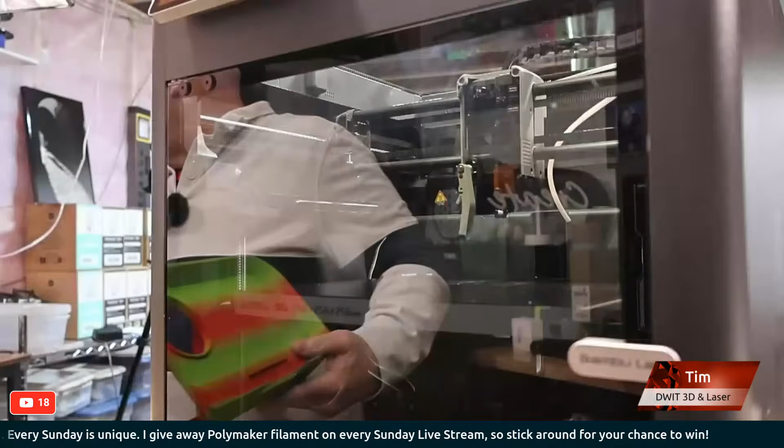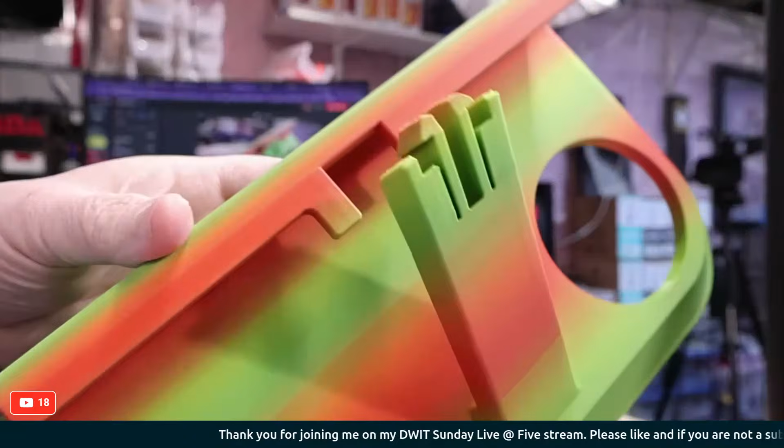Oh, turn the camera this way. There we go, I'll show you the print. The print printed beautiful - this is the bottom layer right here. I love the color mix, it's just a fun print. And there's the back side of it. Really nice, clean print.

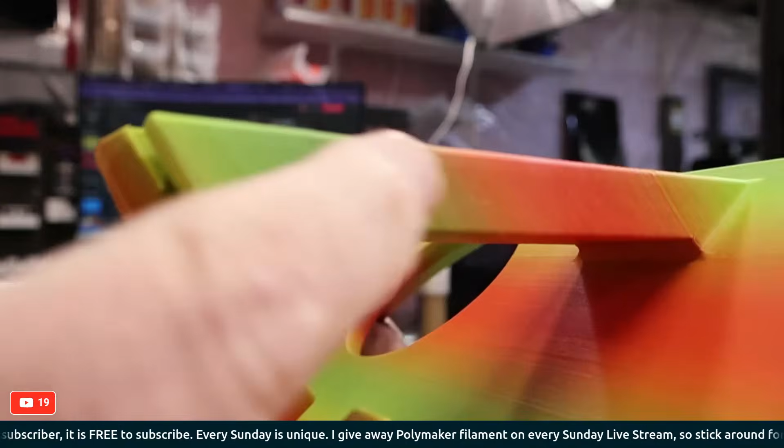If I hold it in a certain light, you can kind of see it had a little bit of a Z-wobble going on right about here, something like that. I think my belts need a little bit of tightening on this printer, but otherwise everything is beautiful on this print.

This just clips over the front handle of your cart, and these little things here just clip into the little railings there - it's kind of cool. Oops, got a little bit of a wobbly part there. But that's what I was working on, so that's pretty cool. People at Costco are going to see that and say, where can I get one?

And the site I got that off of, you can become a Patreon and actually sell his pieces. So we're going to look into that, or I'm going to reverse engineer and design my own. We'll see, I kind of like doing the reverse engineer stuff, designing my own piece so I don't have to pay anybody to sell the piece, or just come up with my own since there's a few tweaks I'd like to do on it.

No weekends or holidays in the world of bagel making. No kidding, 850 to make and deliver. Holy crap, that's a lot of bagels. Wow.

Love bagels, but I can only eat so many because of the diabetic thing. But I love a good bagel.

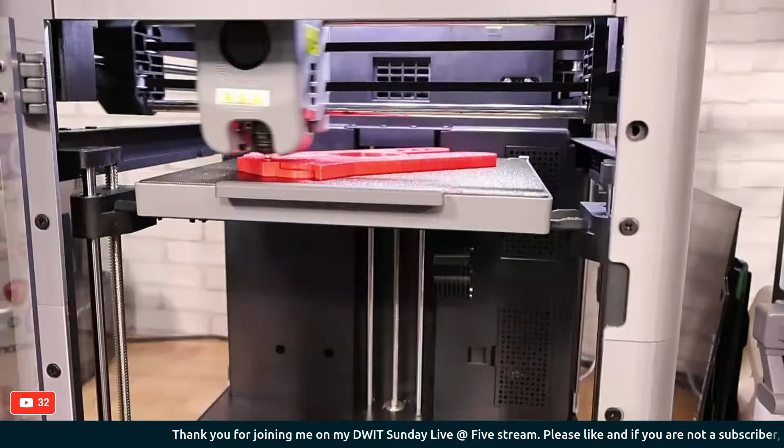I haven't showed this printer off too much at all, but this is the FlashForge Adventurer 5M. This printer over here is just printing one of those hangers I was telling you about - that's what's going on this one, and it's doing a really good job printing this.

So I got sidetracked there. Let's get this tripod back over on the right side - there we go. So we can go ahead and fix this part, and we're going to come down and right about there.

That sounds good. Doing a candy machine off Maker World - need to regulate Skittles intake. Oh, Stephen Machado, you said candy machine. I guess I got to show you what my next project is, because it's right up the alley of a candy machine. So I'm going to show you.

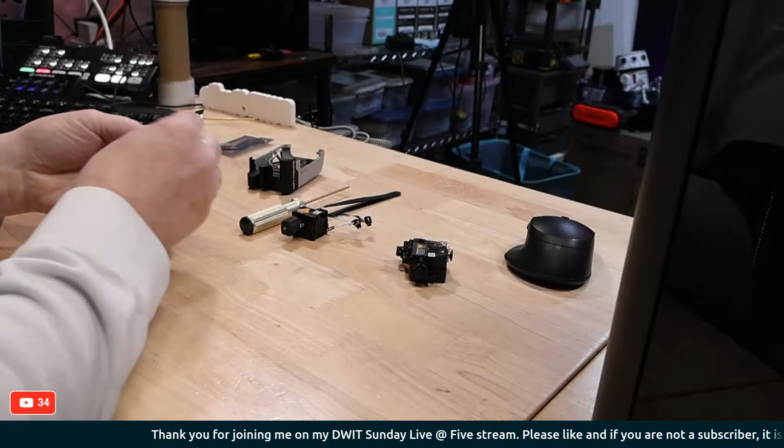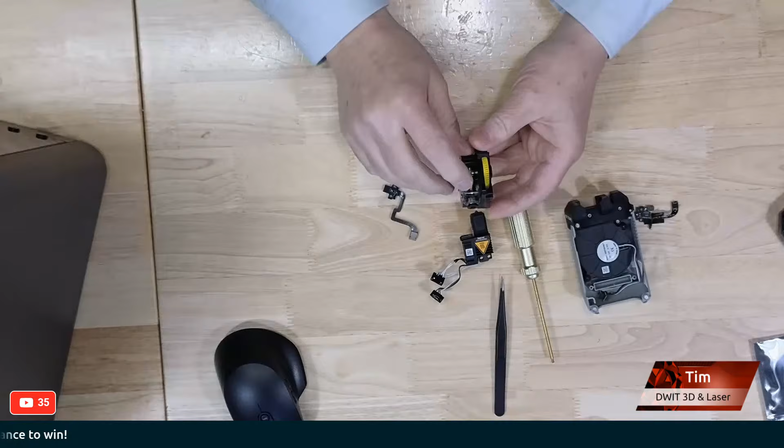Okay, why is that camera so dark? There we are. Anyways, that's the little piece we're replacing right here. I think the overhead's going to show that a little better. Is my overhead camera on? Yeah, it is right there. That's the piece that broke. I don't know how it broke. Shouldn't have broken, but it broke. It doesn't matter how, the fact is it broke. Well, this is the piece we're going to replace. So actually, that's not a bad view right there. And this just goes on onto this. It's sort of a filament sensor / cutter sensor in one here.

So we're going to put that on. We just got to remove a couple screws here. And we'll get this put on, and we'll get this put back together.

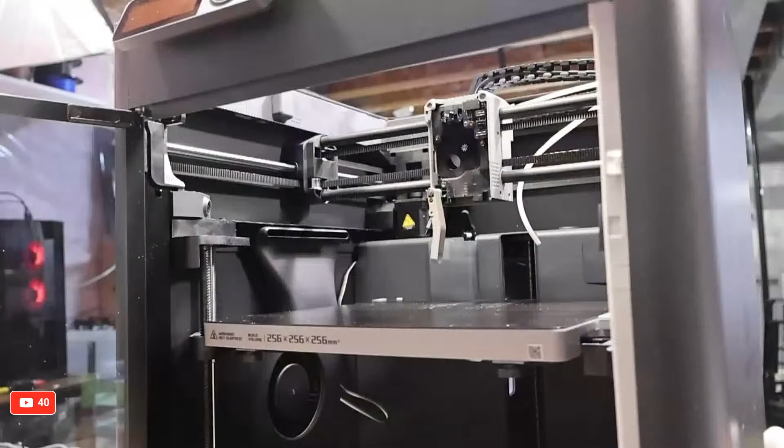Okay, so let's get in under here, I'm going to try to get an angle so that I can see what I'm doing as well. There we are, that's the angle we had before, I believe. Let me switch over to this. There we are. I can put my mug shot down in the bottom right there.

There we go, we all start with experience. We get experience by experiencing. Yeah, and you know what, you get experience by making mistakes. So I wish these doors on the Bambu would open wider, more of a 90-degree angle than they do, but anyways, that's neither here nor there.

So I got to try and get in here. I want to keep the camera, but I also got to get myself in here too. So bear with me as I move this around, it's going to get shaky. Okay, so there we go. Okay, that looks like it's going to work, and I can get my hands in here and do whatever I got to do.

So the screws that I use to take it out, always good to have one of these magnetic trays if you take things apart. Trust me from experience, you don't want to drop screws because you don't find them.

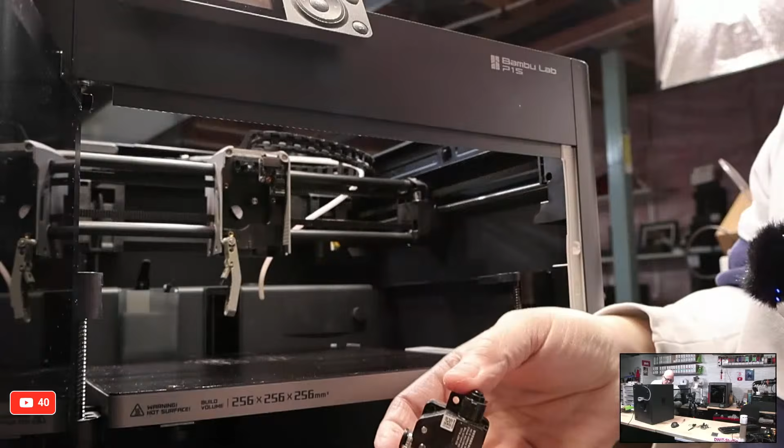Okay, so this guy goes in here like so, and he's going to come, and so I've got to adhere him. First thing I got to do then is take off this two-sided tape that's on this without breaking the wire. This feels like really delicate wire.

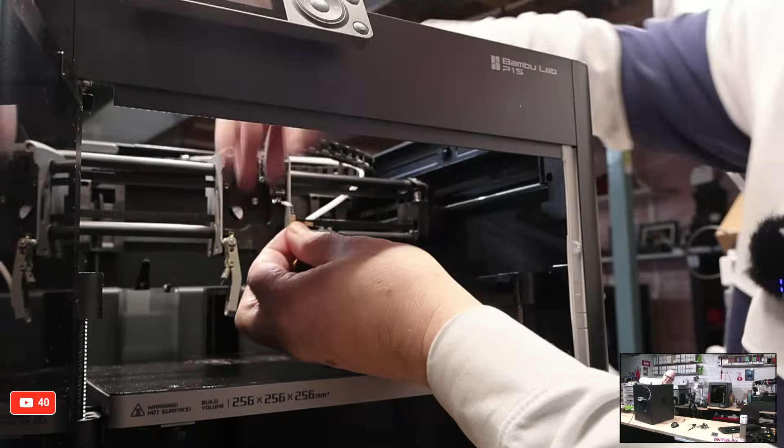So, forgive me while I'm doing this, I can't see the chat too well, so if you're yelling at me or telling me to stop, I'm not seeing it. I'll check the chat in a second here. I'm just going to grab my knife. Here you go guys, blade close to fingers.

There we go, get that tape started and peel that two-sided tape off of here. Come on. It's not as hard as I make it look. I'm trying to keep it in view of the camera, which I'm not doing a very good job of.

So then we're going to take this piece, this is going to come and stick right onto the side of that. That's going to come and stick down to the front of this. Yeah, see, that's not sticking too well at all. Maybe I should have cleaned that off first. Then this is going to stick down like that, and then that's going to just reach up and plug in. That is not sticking at all. That's what I get for getting a cheap one off of Amazon.

Let's just see if I hold that down, if that tape is going to stick. It might stick if I just give it a good rub here. Don't you guys comment on that.

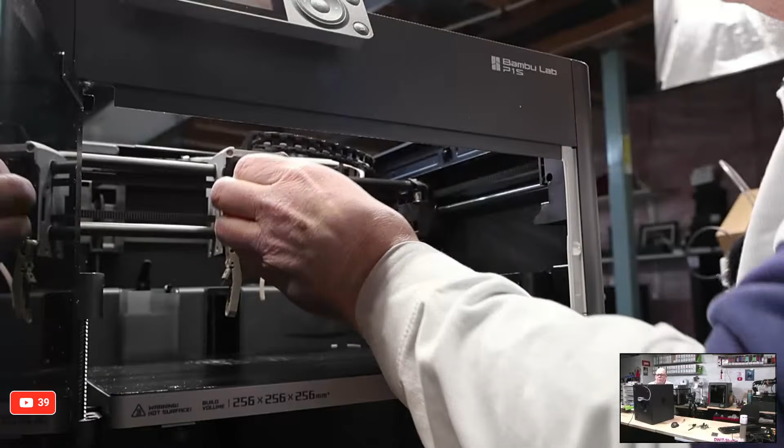Okay, that might work. So now we can put the extruder back in, and at the same time see if I can get that to plug in. Actually, I might be better off to try and plug that in first. These are tiny, tiny little areas that we have to work in here, and I have big, big hands.

I'm going to use a pair of tweezers to assist me with that. Actually, I'm going to screw that in first, at least with one of the screws, so I can hold it when I plug it in. So let's grab one of these screws.

These are little M3 screws, I think. So we'll put this one in here. Come on, right in here. Let's do this one that I can actually see. There we go. Okay, so that one's in.

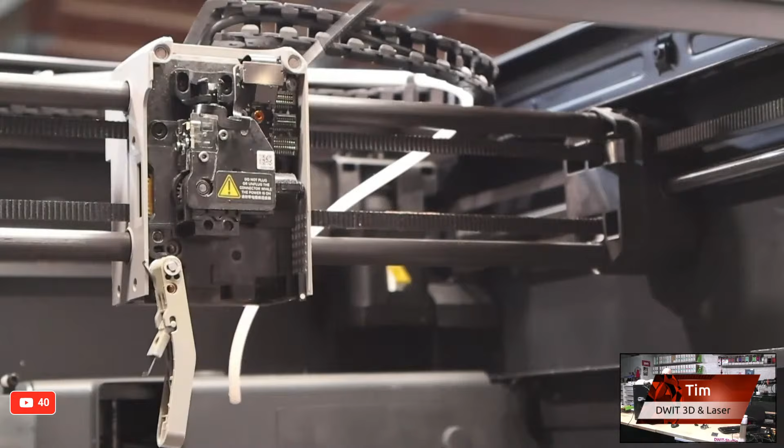Now that's not going to move, so now I can try and work that plug in, but I need my tweezers, which are right here. Let's see if I can... trying to see what's happening. So what I'm trying to do is this little plate here has to plug into the little plug behind it. Like just like that. There we go. That's plugged in. So this little plate right here is just plugged in right behind it.

Okay, and now I just got to put the rest of the screws in. And so we had one down here. No, we didn't. Where did the other screws go? Right in here, if I'm not mistaken, there's one right in here.

I think that's right. Why can't... See, that's why I should have taken a picture of it. Actually, I can go to the wiki page and it'll show me, but I'm sure that's where the one goes. But I think what I got to do is just loosen this one off a little bit, so I get a little bit of play in there. And then, there we go. Now I should be able to get this one in.

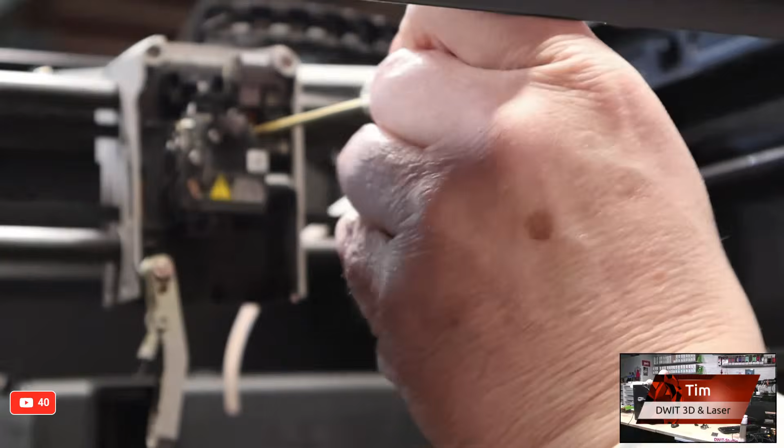Huh. Maybe that's... Oh, I'm in the wrong spot. Duh, right over here, I'm in the wrong spot. See, that's why it helps to take pictures so you know where you're putting your screws into. One there. See? We're talking about mistakes.

And the third one... Oh, where's that third one go? One, two... sure there was three of them in there. I need to get a light, it's pretty dark in there. I'm going to blind you all here. Let's see. One, two. Where's that third one going? Maybe there was only two.

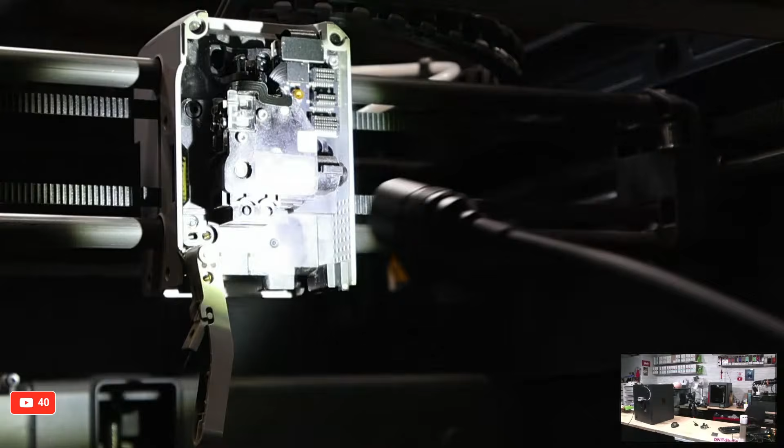One, two. Oh, I thought for sure there was three. Huh, maybe there was only the two. But I'll just have a look on the wiki site, just to see. Like fixing a cell phone.

Okay, hang on one second. I think I still have that page opened. Maybe I don't. Let's just have a look at it real quick here. Bear with me one sec, folks, while I have a look at this. Here we go. Bambu has a great wiki site, just FYI.

Boom. Oh no, I want the extruder replacement. There we go, extruder replacement. Oops. There we go, dum dum dum. And I'm on the wrong part again.

Okay, down bottom left. Okay, so now it's showing me where it is. Okay, so let's go back. It's showing it on the bottom left here. Okay, so bottom left. Oh, right there, okay, right there. Now I see. Right there. See if I can... sorry, it's a bit blurry there with my hand in the way.

There we are. And let's just snug up these other two while we're in here, that one and this one. Okay, so basically they were... I wasn't looking way down here, but it was way down here, up here, and over here. So those are in.

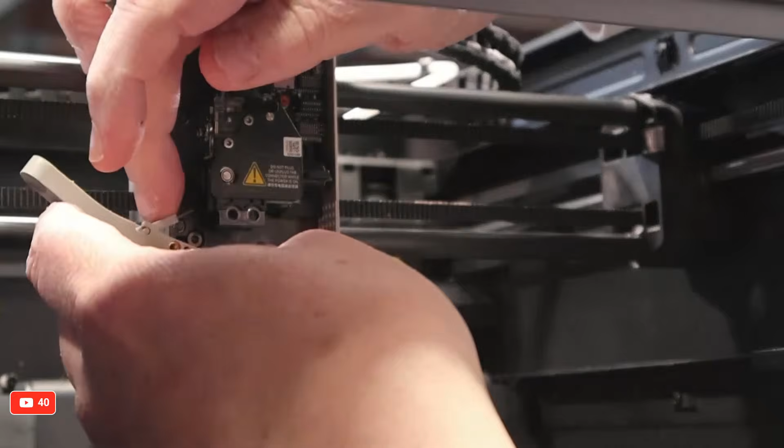Now we got to bring the blade, the cutter, back up. Let's bring the cutter back in. No, okay. There we go, cutter goes right in there, and there's a screw for the cutter. Where did I put the little cutter screw? I believe this was the screw for the cutter.

Just gonna get that in all the way. Come on. There we go. So there's the cutter screw, and the cutter's back in place here.

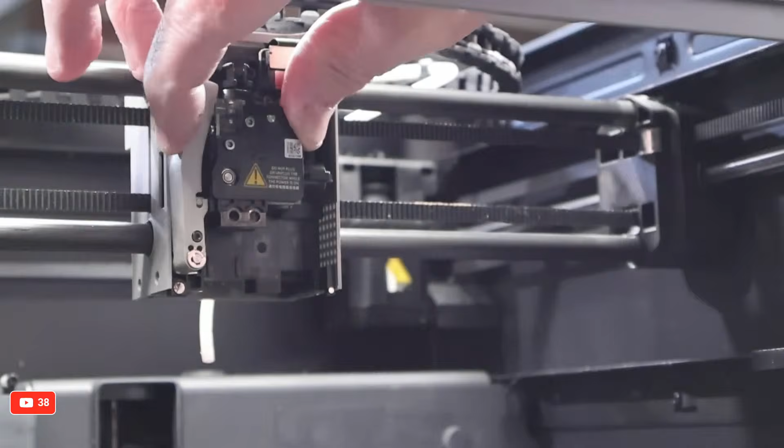Okay, now we got to mount the hot end in. Where did I put the two screws for the hot end, though? Did I not? They're not in this dish. You'd think I would have put them in this dish. But there's two screws to mount the hot end back in, which is not a big deal. I have spares. But where did I put them? I put them somewhere where I wouldn't lose them, believe it or not. But we have spare screws for that, so not a big deal.

Okay, so let's get the hot end plug back in anyways, and then we'll find the screws. I don't remember where I put them, to be honest with you. Anyways, a hot end, this part.

See, the tricky part, the one thing I don't like about the hot end on this is the routing of the wires, because I got to put all the wires behind this little plastic tab right here. And every time I put my hands in there, it adjusts the auto exposure and makes it dark on you, and I don't want that to happen, but there's not much I can do.

So now I've got to try with my tweezers to get these little wires without breaking them in behind, like that, and then like that, and come on, like that, and then we plug the bottom one in. Actually, this is the bottom one, this is the top one. So this goes, come on. Oh, I gotta do the bottom one first.

These are interesting screws. I don't even know what you call those. They've got a flat neck and then threads near the tip. Those are the specific hot end screws you need for this. There we go.

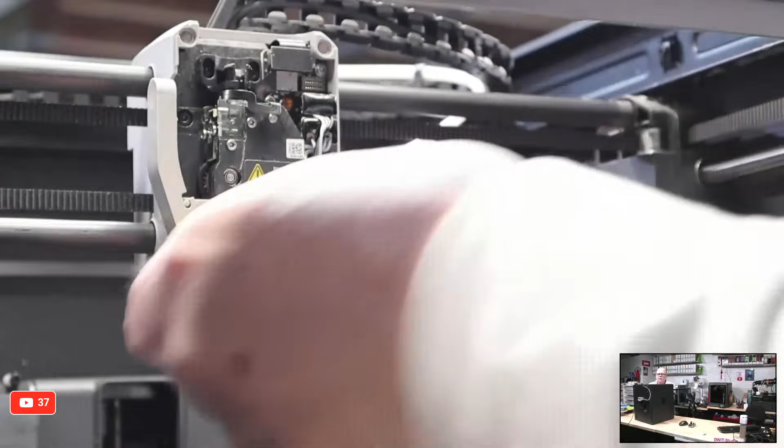Okay, that one's good. And that one's good. Hot ends in place, everything seems to be working. We'll grab the fan. We'll plug the fan wire in this top one here.

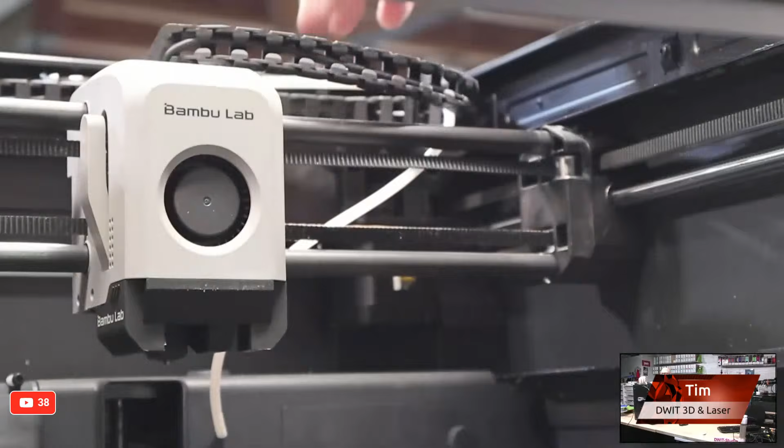Like so. And we should be good to roll. Let's put the PTFE tube back in. We should be good to roll. Okay, let's get the camera out of the way here.

Let's start it up and see if we get that same error, if this is actually going to work. See if I actually made something work for a change. Oh, I forgot I was still on this camera.

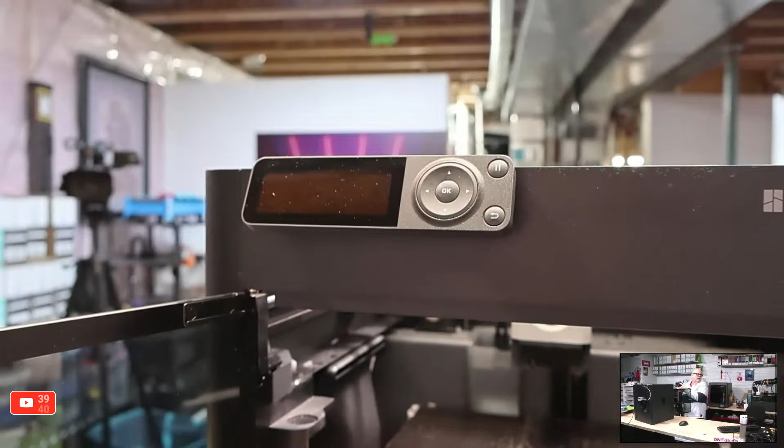I'm giving you guys a ride around the shop. Oh well. There we go, you get the free blurry tour of the shop. Now did I screw the autofocus? What the heck did I do with my lens? Oh, there we go, somehow I screwed things up there. Okay, here we go, now we'll plug this in and we'll see if it's actually going to work.

But I got to find a power plug here first. Just don't drop you? No, I won't drop you. My coat hanger finished printing. Where's the power plug? I had a power plug out for this earlier. Bear with me, I got to go around here and grab a plug. There it is, there it is, right here, back of the printer. We'll plug it into this power bar right here. I got power bars everywhere.

Okay, and we'll power the printer on. Other than the fact I don't have an AMS unit on it, but that's okay. It should let me come without that error. It just takes a second for the screen to populate. I really should put, although the Panda Touches I have, apparently you can get them to work on these things. There we go, ready to print.

See if that error, look at that, there's something funky going on there. Yeah look, it's frozen screen, look at that. Let me reboot it. I don't know if the error is still there or not, but it's frozen on that screen. Come on, there, let me reboot it. Off and on.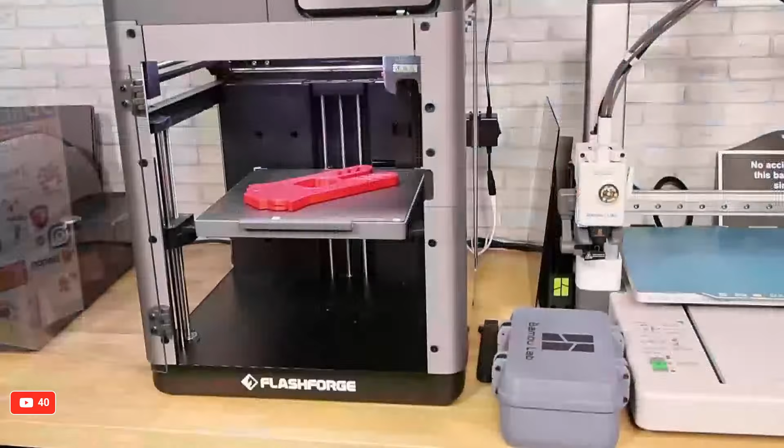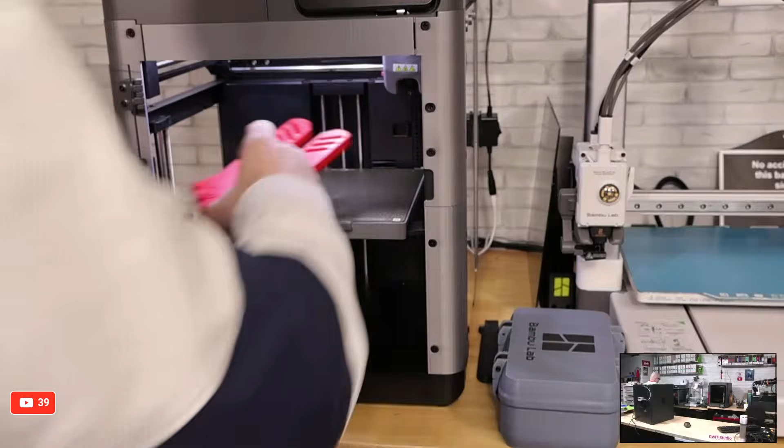In the meantime, while I'm waiting for this thing to do the firmware update, which is going very quick, we have a finished hanger over here. Let me pop this off the bed. Really good job printing this hanger. This is a great little printer. If you haven't experienced the FlashForge printers, great little printer. Nice job printing this hanger. Nice release, so there's that little hanger. I guess, oh it didn't print the little supports. Normally there's a little support right in here and right in here. So this printed, and look at that, this one released. Oh, that one didn't do too good.

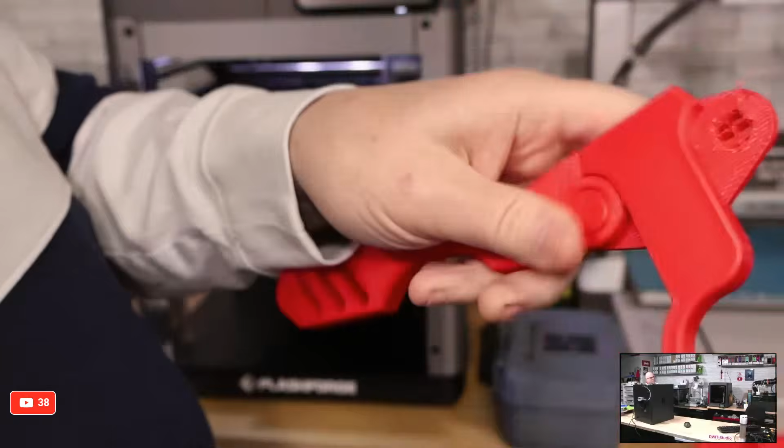Okay, well that opened okay, but that one is really loose. Something didn't work out here, I'm going to have to reprint that. But that's basically the idea. No, something failed right there. This side worked out great, I don't know what happened there. But as I say, this was a scrap end roll of filament, so I don't know, but that worked out great.

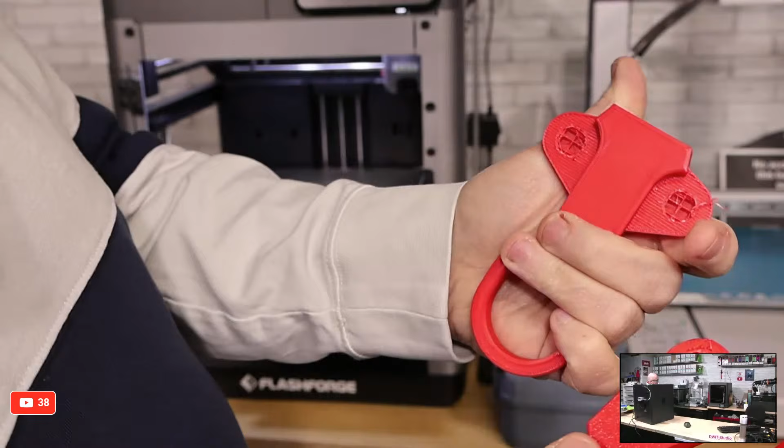Something did not adhere really well on this one, so something is awry with these joints. Okay, believe me, it works, it works much better. I'm going to have to see what's going on with this one as well. I'm wondering if this filament is just too wet, because this is old filament that's been sitting around. But believe me, it shouldn't do that.

Where did I put them? Just want to prove to you that it does work. Oh, right here, see, these ones worked out perfect, no problems with the joints or anything like that. That one and this one, one was printed on the Centauri Carbon, the other was printed on a P1P. So I don't know what happened there, but we're going to reprint it and see what happens. We don't give up.

So we'll try one more, and we're going to do a reprint here. Boom, boom, like that, we're going to print that and go extracting file. We want to do bed leveling and print. There we go, we'll print it again and see what happened.

The boss is here. What boss? Who's here? What boss? Dun, dun, dun, did I miss something? Oh, the wife, oh okay, there you go.

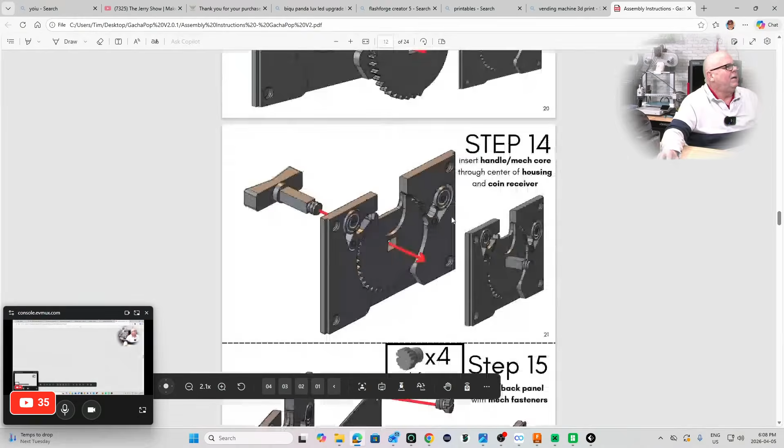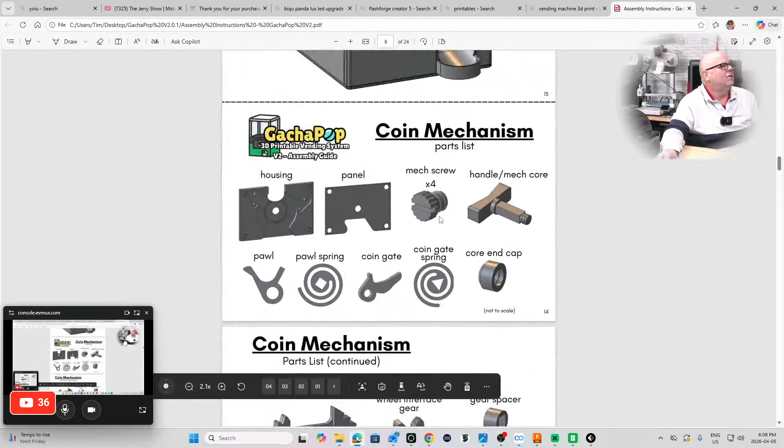You get a PDF file with the assembly instructions. This is all 3D printed, and they even have a PDF explaining or suggesting filament types to use, settings, etc. So this is all the assembly instructions, all the way through. Again, all these parts, we'll go through all this as we build this project.

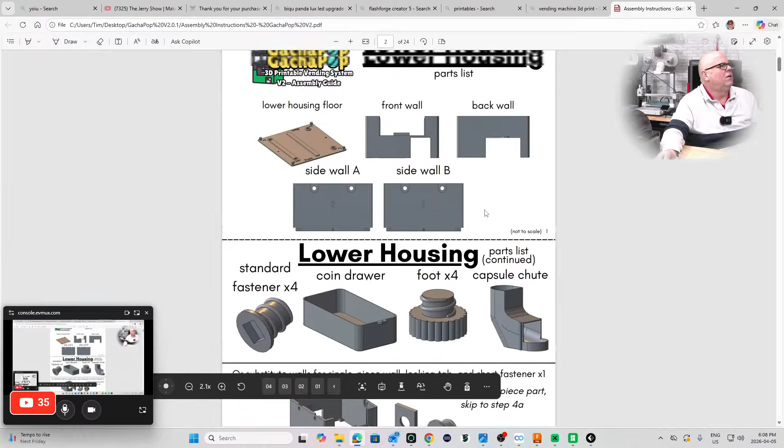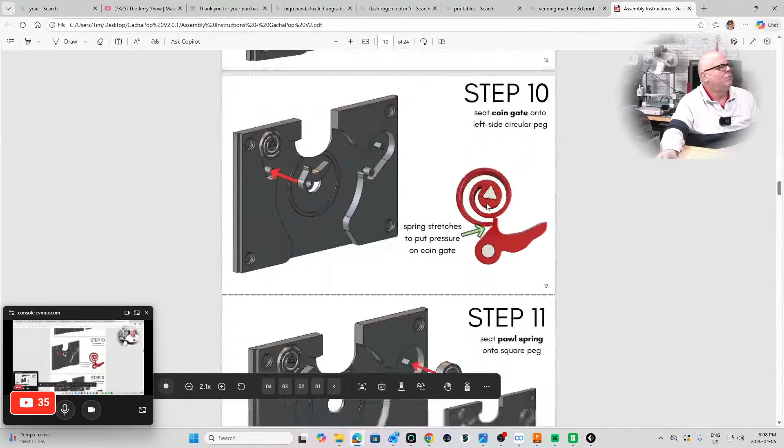So we're going to be printing all these parts, lower housing parts. You're going to assemble the lower housing, and so on all the way through. Just skipping through here, you can see all the little printed parts involved. It's all 3D printed mechanics and everything to do with it.

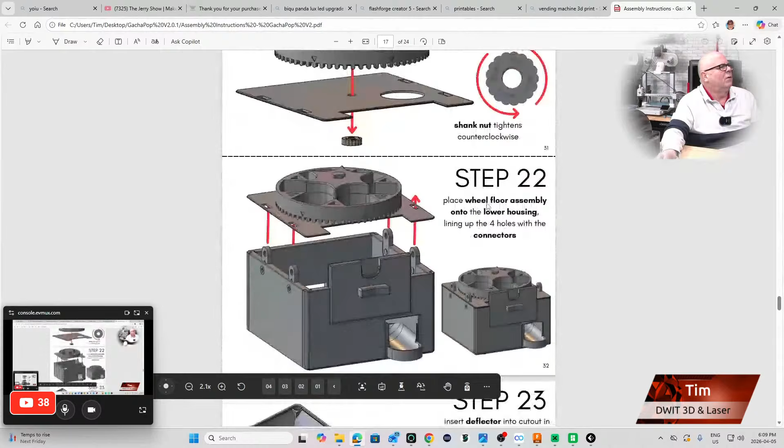All this, okay, we got the wheel housing, in other words, the vending part where you put the money in. Looks like they're very, very good detailed instructions. I did hear about one little flaw in the machine, but we'll address that as we get to it.

So that's the one file they give you. And then the other one, you have your changelog file, basically talking about, you know, it's a changelog file. We all know what a changelog file is. And then we have your print settings.

It tells you the recommended printer settings, nozzle size, etc. The coin mech special settings, everything, whether you need a brim, supports, or whatever. Really good detailed instructions there.

And then you have your personal use license agreement, which you can read through if you decide to download this file. And then you have your color cheat sheet, so you can basically see what to do.

You're going to pick two primary colors and a secondary color. This is telling you which pieces to print in which color, basically, so that you make it look good. We'll decide on the colors and so forth later.

And then, of course, we have our individual STLs. We have seven different categories of STLs. For instance, your hardware, you've got your quarter fasteners, your tool fasteners, and then in here you have all of your various STLs, all the files.

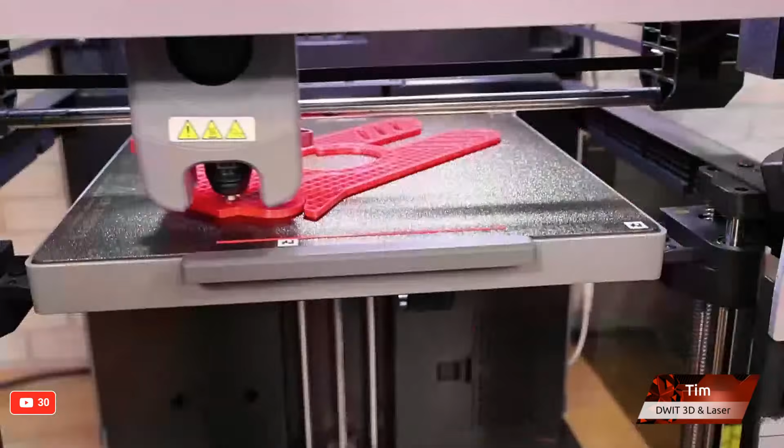So you guys can watch that while I go look. The baby blue and purple might not be a bad idea. Is this a full roll of purple up here? That is a full roll of purple. And then the baby blue - let me go look.

Sky blue would be kind of like the baby blue, I suppose. Teal, white, blue, green, black. So let's look at the sky blue. It's matte - do I want to use a matte filament with a standard filament? No, I think maybe the cyan.

What would purple and cyan? That's translucent cyan, though. Teal and purple? Let's see, let's take the teal out.

Let's take the teal out, but I've also got a bunch of polylite as well, though not as many varieties of colors in the polylite. Okay, let's take the teal and the purple. Let's look at the teal and the purple.

Green goes better with purple. Yeah, teal and purple, not a fan. Neon green and purple - what else do I have for green? Do I have any more greens? Oh, I do have a green. Okay, let's take that out.

You know what, I'm in a printing business, you'd think I'd be able to make decisions on these colors. That green - there's no green left in there. I could always order some more green, I suppose. There's celestial green. There's a celestial green. Okay, here we go.

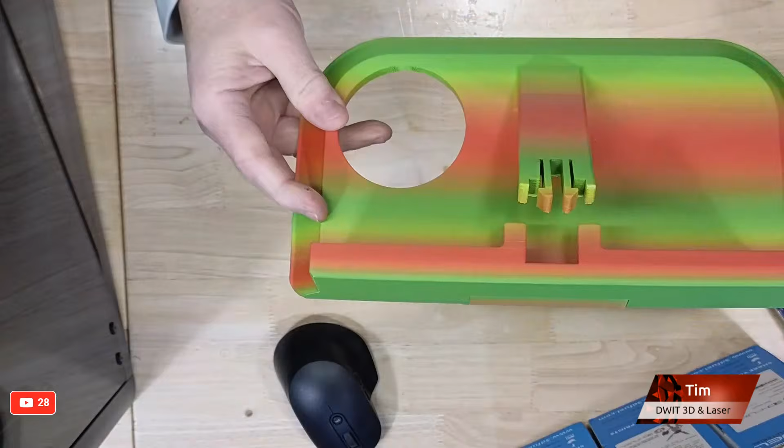I am hungry. Hey Jerry, if you want, have a look at this Costco tray I ran. Look at the colors, it's beautiful. That's the tray we clip onto your shopping cart at Costco, and you can have your phone in the front, your drink, your hot dog. Pretty cool. It's more orange than red, the camera makes it look red. It's actually more orange, it's the overhead camera. Yeah, that's more like it. There we go, that's more accurate to the colors on this thing. It's beautiful, I just love that color combination.

It's beautiful. This is the Polymaker high temperature gradient tropical PLA, really really cool. Don't know what this hole is for, it's printed on both models so far and it slices like that. Maybe that's for an antenna, I don't know, I don't know what that would be for. Anyways, but that's beautiful, beautiful. This camera has much better color than my main one. Look at that, there we go.

DWIT, who's designer of the hangers? I'll show you the hanger, I'll show you that site of the place, and then if you can get on Maker World, DWIT 3D, and a DWIT card when people ask to buy one. Yeah, I've got business cards, I carry business cards everywhere I go. My new DWIT cards, I don't know if I have any down here, but I got some upstairs. I've designed myself some new business cards, so I know a guy who knows a printer.

The foldable clothes hanger is right here, so go ahead and just take this down or note this right here. It's on Maker World, and it's called the foldable clothes hanger print in place, and it's by Ethan Shen. Remember Ethan, my son, Ethan with two E's, Ethan Shen. So nice print, works out really well. Don't know what happened to my first one, but yeah, look at that.

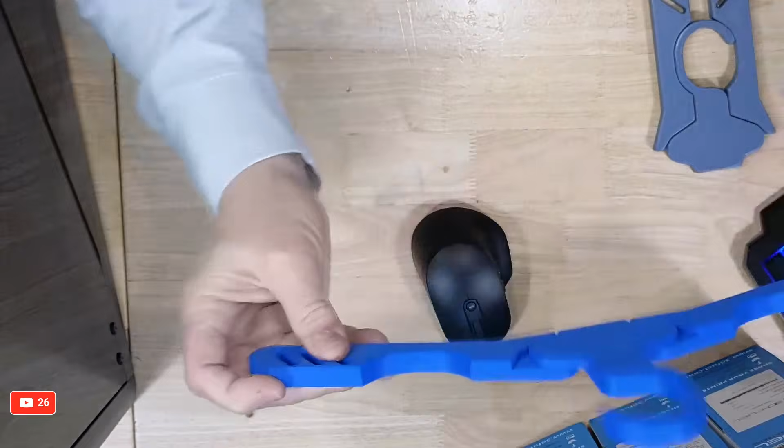If we look on the overhead, the tolerances on this one are incredibly, it almost feels sloppy. When it opens, it's nice and solid, but you kind of see there's a little bit of movement. I can move this up and down here, but it's not coming apart or anything, and it works fine.

Okay, this was done on one of my Bambus, on a P1P. This one I printed on my A1, right behind me here.

This one here, if you look, there's no movement at all on this. It's stiff to open. It's nice, no play at all in it. So again, that's different tolerance on the printer.

Now, I did find when I did this, if I don't just try to force it open to begin with, what I found is I had to twist a little bit. So do this and do this a little bit, it kind of breaks it apart. You'll hear it crack and crack, and then open it up. Same thing with this one, I had to kind of twist it a little bit, not much, and then it opened up no problem. So it's very possible that could be why.

Oh, wrong camera. So, first print ever other than calibration.

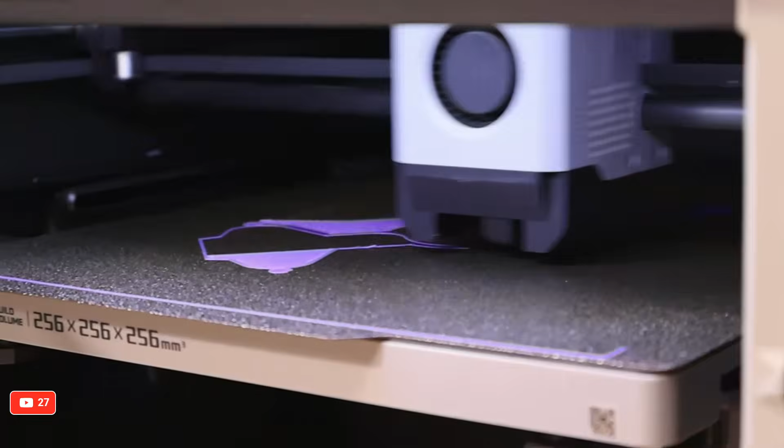Oops. Yep, so it's working fine. There we go. Yeah, awesome, yay, I like when things work out.

Oh, this is all twisted. Hold on, oof, there we go. Let's move that back down. There we go, okay, let's move you out of the way.

It looks like the hanger on the Flashforge is doing well. So there we go, just going to leave that door open because we don't want a heated chamber for PLA necessarily. Let me check this first layer, and we are smooth, yeah, so we got this working good. So that one little part was the only problem with this. Back to working, yeah, it's nice to have another working printer.

Add that one to the queue. You need some hangers. Yeah, they're really cool, I like them. You're into stingy with your filament. Hangers are cheap.

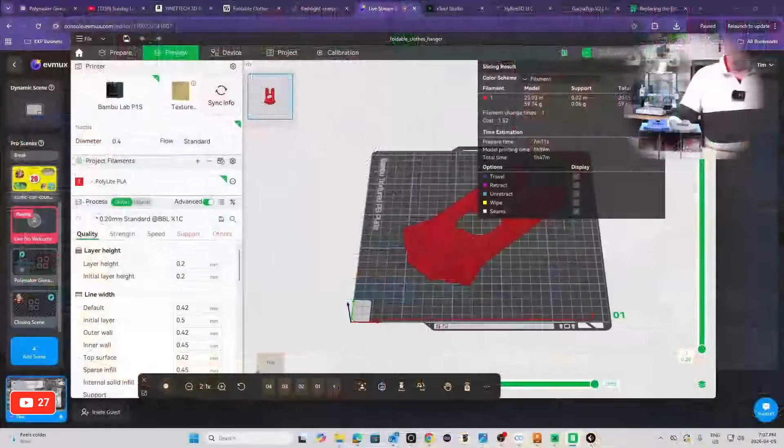Let me see how many grams of filament this takes. Let me check the preview. It's going to be 59.8 grams of filament. I'll show you here. There it is, right there. 59.8, because the supports take 0.06 grams. I haven't seen the supports print, but you can see there's a tiny support right there, and another tiny one there. That takes 0.06 grams, and the whole project is 59.8 grams of filament.

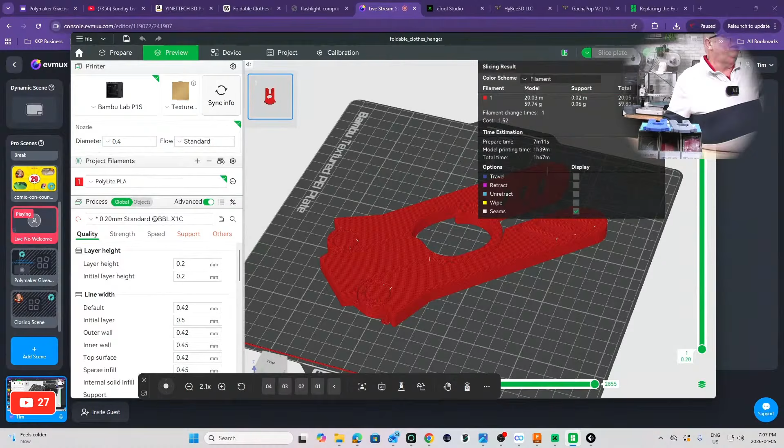So when you have those little partial spools hanging around with just a bit left on them, go ahead and print a hanger with it instead of, what else are you going to do with it? And if you run out of filament partway through, load another color in and you have a 2-layer, 2-color hanger.

Cheap to do. And the cost on that, since I actually have my filament prices entered in here, the cost is $1.52. And that's probably high, because what I tend to do is if it's a $29 roll of filament, I put my filament cost at $50 to allow for oopses, for a brim, or a purge line or whatever. I always put probably close to twice the cost of my filament in so I know my actual cost. If I'm basing that on a sell price, I know that's kind of accurate. So this thing is $1.52 to print this hanger.

Can you do any better than that? You know, you can go buy a wooden hanger. Don't buy metal hangers. If you use metal hangers, unsubscribe from me. I don't like metal hangers. Sorry, no, don't, I'm just kidding. But I don't like metal hangers. So, yeah, anyways, try it.

I'm going to be hanging a bunch of clothes with it to try. It's strong, it's going to hold a lot of weight. Like this hook, because your layer lines are like this, you're not worried about your hook snapping.